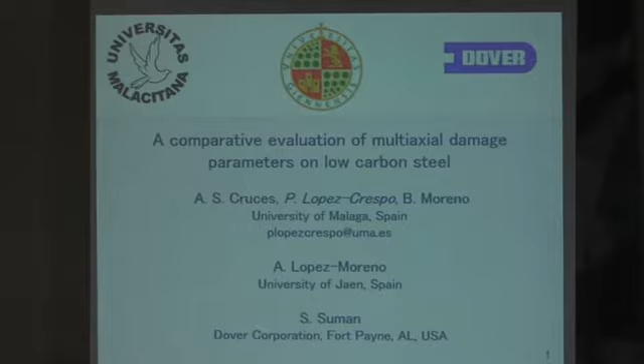In the title it actually said multiaxial damage parameters, but I'm actually going to speak about really just one damage parameter and some damage parameters overall. First, I would like to thank my colleagues from the University of Malaga, the University of Jaén, and from Dover Corporation for their help.

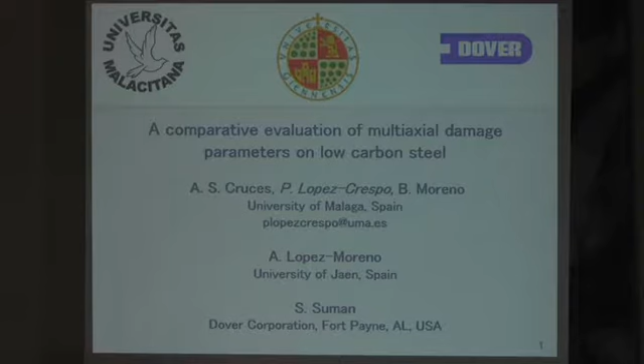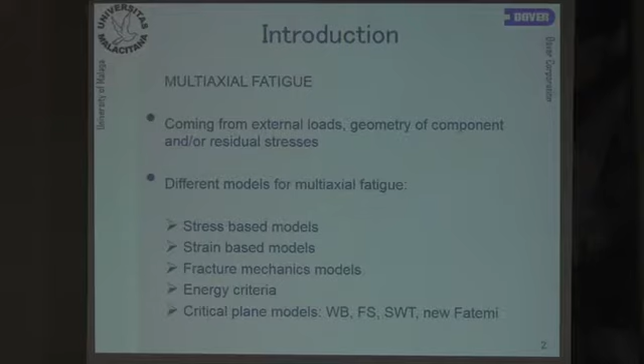Before everything, I'd like to say that I'm kind of new in this business of multi-axial fatigue. When we started, maybe 3 or 4 years ago, working on multi-axial fatigue, we looked at the literature and saw there were quite a few models like stress and strain-based models, fracture mechanics, energy criteria, and also critical plane approaches. We thought the critical plane models were quite interesting because, in principle, they give information not only about the fatigue life but also the dominant crack plane. Since we were involved a couple of times in the crack path conference, we thought maybe this is interesting, because if we already have the initial crack orientation, we've got kind of half of the problem sorted out.

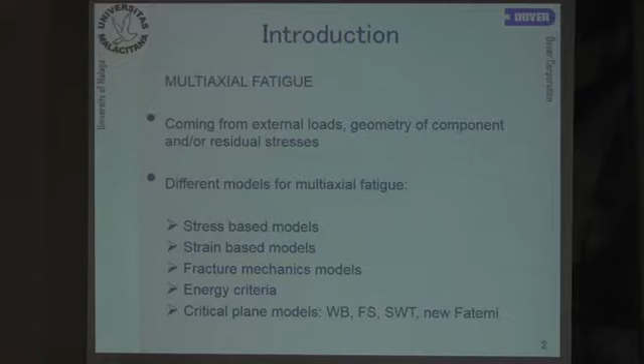That's why we decided to do the first preliminary analysis with the multi-axial critical plane models. We thought of using some of the most cited ones: Wang-Brown, Fatemi-Socie, and Smith-Watson-Topper. Last year we went to the multi-axial conference in Seville, and Fatemi proposed a variation of his model from 1988 with Socie, saying it was much better and would improve the fatigue life prediction. So we thought, since we're trying different models, why not try it too? We gave it a try with this new Fatemi model.

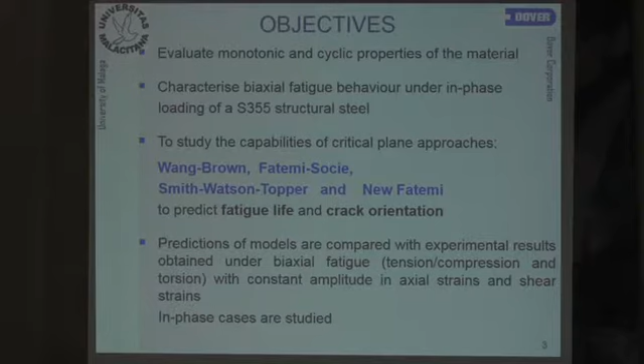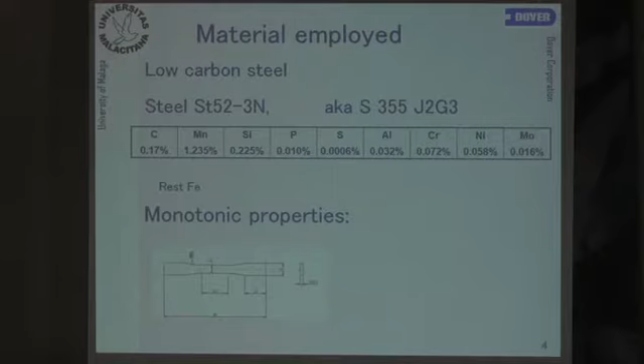For predicting the fatigue life and the crack orientation, we thought we could just apply the models directly, but of course we needed to do more. We had a structural steel and had to do a whole characterization, both monotonic and cyclic. That was the first thing we needed to do. We took a structural steel, S355, low carbon steel, and did some monotonic tests for finding tensile and compression properties.

We also had to get involved with the biaxial machine. We weren't really looking forward to it, but in the end we had to. We had to use the biaxial extensometer, which is quite tricky because of this pin which holds the sample - it doesn't really grip very tightly. So you need to be really careful when you mount the extensometer, and on top of that, if the machine moves a bit more than normal, the whole experiment is ruined because it's strain control. That was one of the difficulties we found in the experiment.

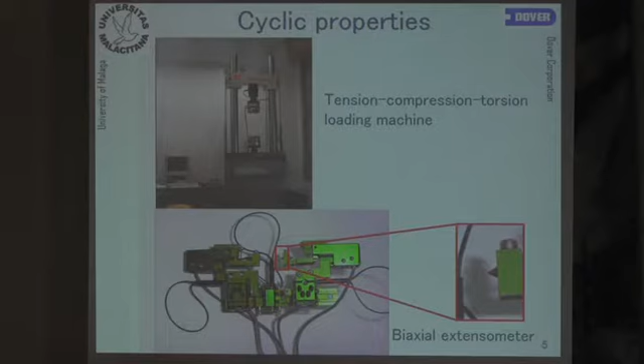Let me give you a tip: a small piece of sandpaper bonded on the specimen is going to solve the problem. Just bond a small piece of sandpaper right where the pin goes, over the sandpaper, and it solves the problem. So hopefully next time we can go from 4 Hertz to maybe 10 Hertz. Don't be too optimistic.

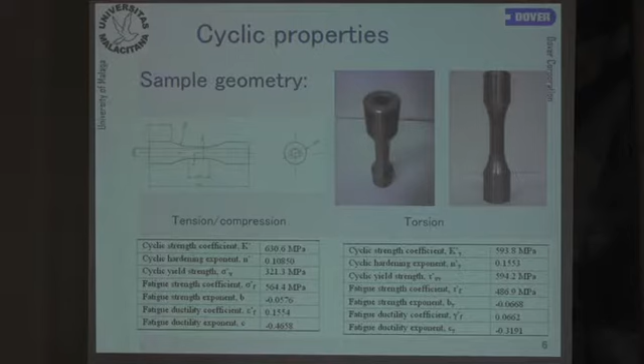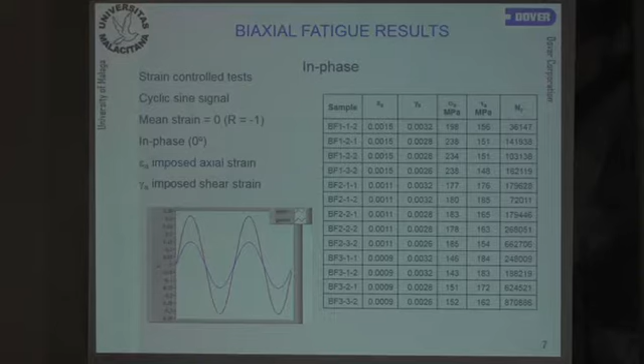Anyway, we managed to measure the cyclic properties, both in tension, compression, and torsion, and then we did a few in-phase and out-of-phase tests with zero mean strain and with imposed axial and shear strain. We did 13 in-phase tests and 11 out-of-phase tests. In this talk I will only speak about the results of the in-phase tests, because it's just easier.

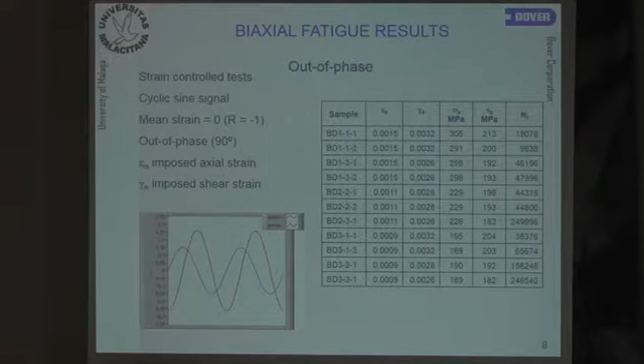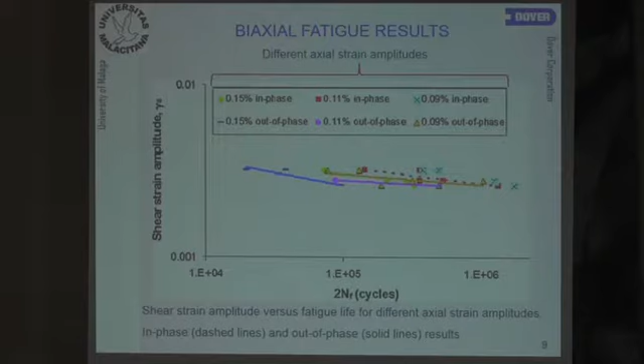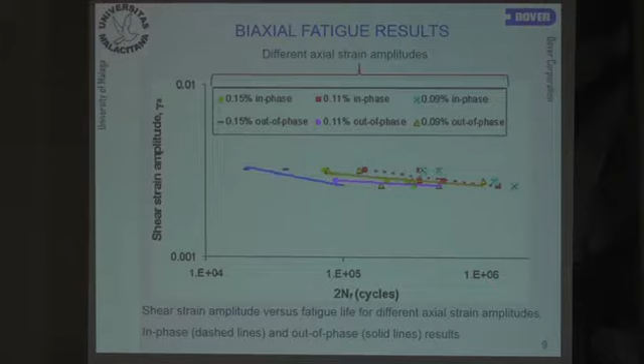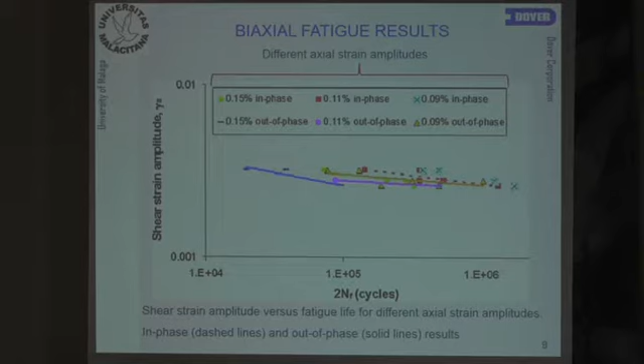So we can see here the results of all the tests. This figure was useful for us to see that we weren't doing everything very wrong, because we can see that comparing in-phase and out-of-phase, the out-of-phase experiments had a lower fatigue life. That made sense and agreed with the literature, so we figured we were doing things more or less all right.

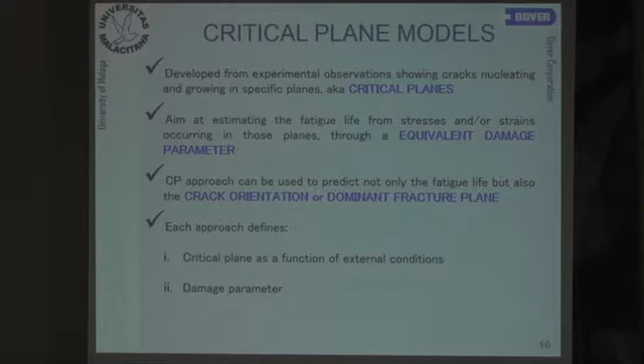So we started using the critical plane models, and we found that they give a prediction not only of the fatigue life but also the crack orientation, which was interesting. We started with, for example, the Wang-Brown model, which is based on the assumption that the cyclic shear strain causes crack nucleation, and then the cyclic normal strain contributes to crack growth.

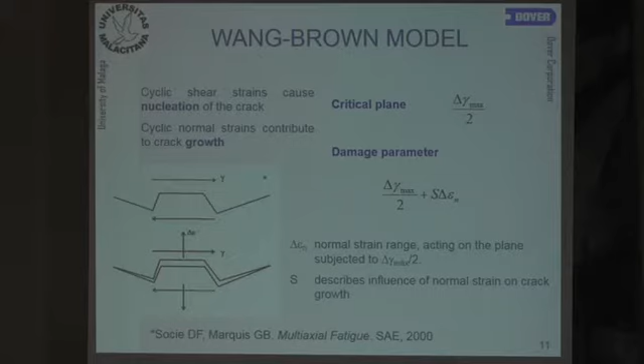So which is the real critical plane? Originally it was defined as the one with maximum shear strain, but I guess the second definition, the one with maximum damage parameter, is better. We actually tried both, but it was a question I wanted to ask around, because I keep seeing papers, even recent ones, where they assume the critical plane is the first definition, while other regularly published papers use the plane with the maximum value of damage parameter as the critical plane.

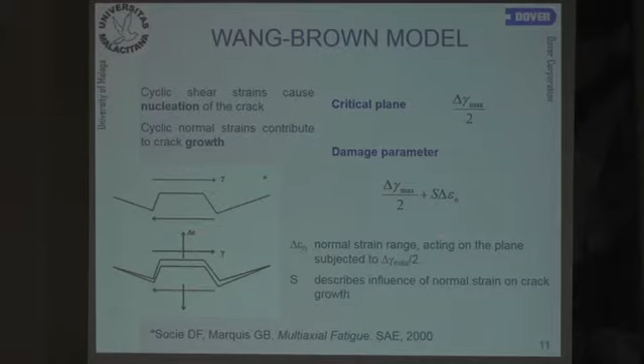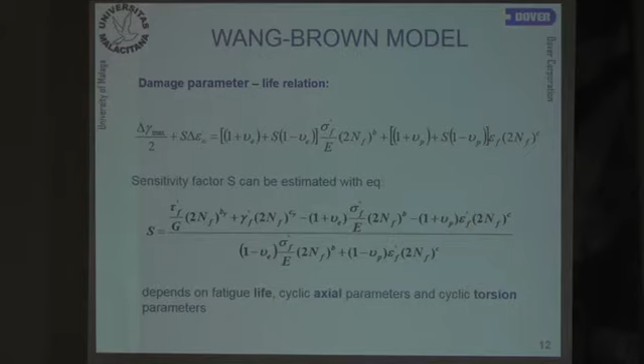Wang-Brown also gives a relation between the damage parameter and the life. We also looked at the Fatemi-Socie model.

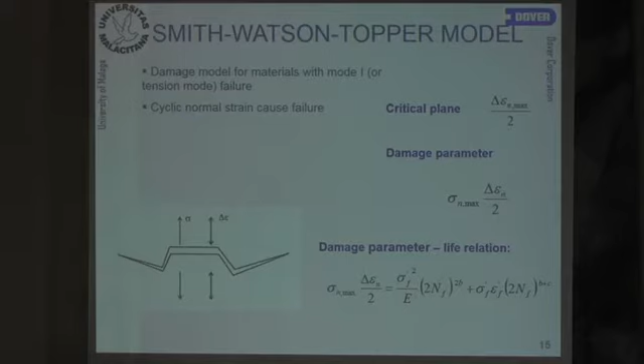We also use the Smith-Watson-Topper model, used for materials with mode 1 or tensile failure mode. It assumes that it's a cyclic normal strain that causes the failure. In this case, the critical plane and the damage parameter are coincident. Again, we have a relation between both.

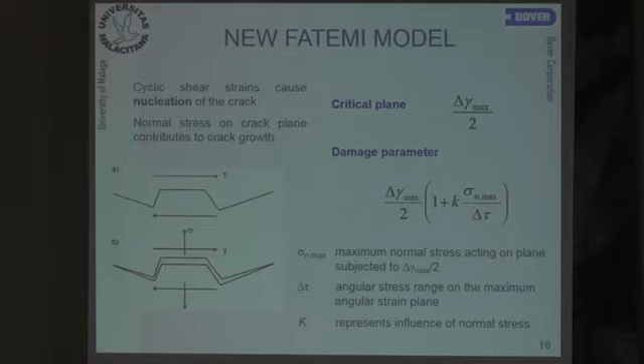And finally, the new Fatemi-Socie model is similar to the other model. It assumes the nucleation of the crack is caused by cyclic shear strain, and the normal stress on the crack plane is the one that also contributes to the crack growth. But instead of using the yield stress to make this term dimensionless, it uses the angular stress range on the maximum angular shear strain plane. So that's the small difference.

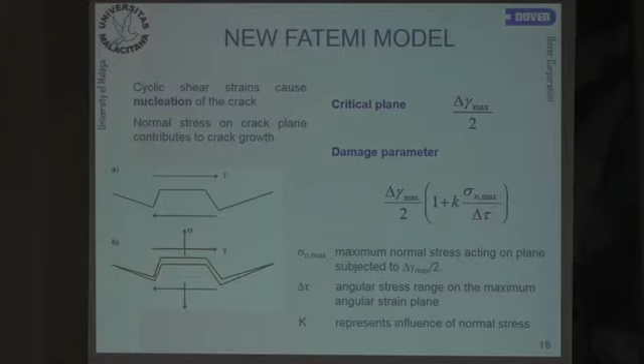Last year he said at the conference that he would get much better results, so we just wanted to try it.

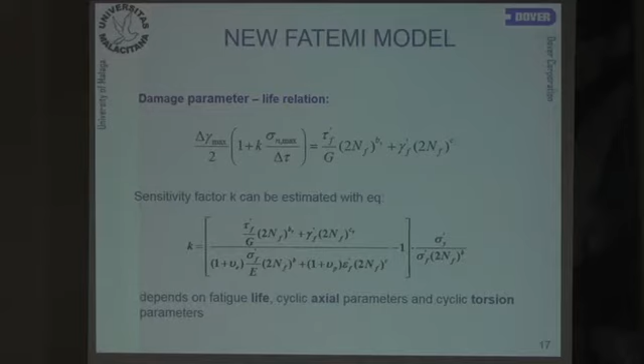It also uses sensitivity factors that depend on the fatigue life and the cyclic axial parameters, and torsion parameters. Last year he said it depends on the material, and in our case it was 1.1, the value of this scale.

So we had to do an evaluation of all the planes. For the proportional loading, it was a bit more clear to us, because the maximum value through the cycle was easier to identify. For the non-proportional loading, it was a bit more difficult. We had to evaluate all the points.

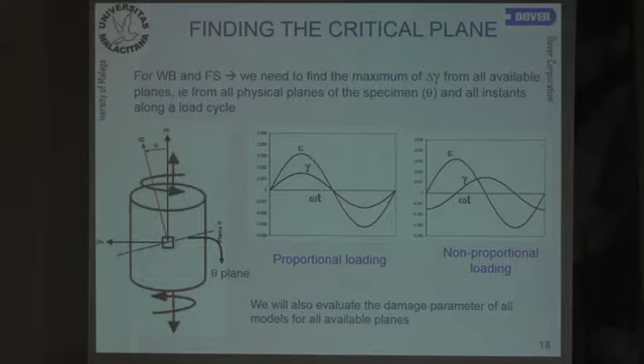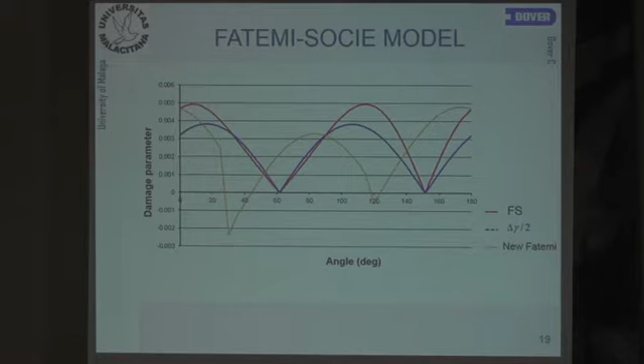And then we plotted the evolution of the damage parameter and the shear strain amplitude. We saw that, as I was saying before, the critical plane, both according to Fatemi-Socie and Wang-Brown, would be those with the maximum value of the shear strain amplitude.

But then the maximum value of the damage parameter, for example in the case of Fatemi-Socie, is not exactly at this value, here around 105 or so, but at a slightly bigger value, and then this other point, the maximum value of the damage parameter, is shifted as well.

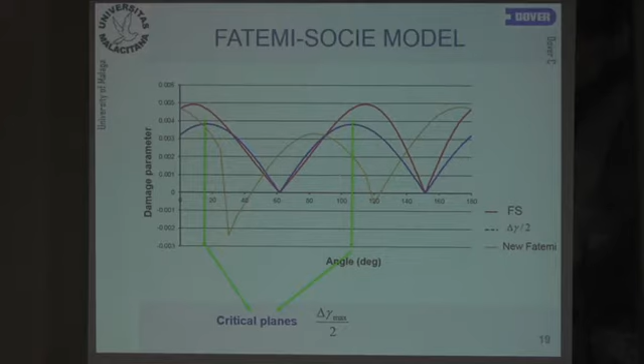So the other thing is that from a mathematical point of view, the maximum range actually happens at one single point, but from a material science point of view, where we have microstructural features, like any type of defects or microstructural barriers, it doesn't make sense to use just one single point with the maximum value of strain.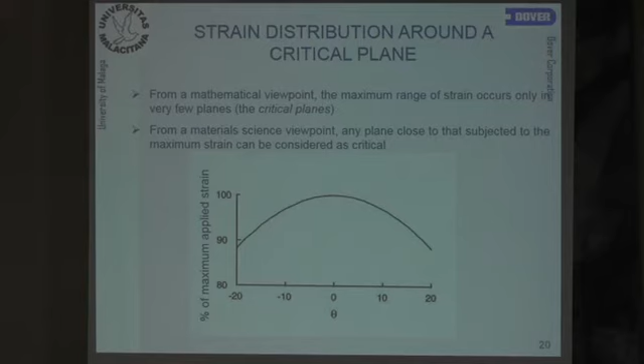So what people normally do is, instead of considering just one single plane, use a range of planes. Provided we go between plus minus 20 degrees, we would have a strain value of 90% of the maximum, which makes sense.

So we looked at the different plane orientations, and we observed that if we look at the first critical plane predicted by Fatemi-Socie, one of the planes with the maximum shear strain amplitude, only two of them agree using this 90% of the maximum value criterion.

If we use the second critical plane angle, 6 planes agree out of the 13 specimens that we tested. Then we looked at the maximum value of the damage parameter: for Wang-Brown, none of them agree; for Fatemi-Socie, 5 planes agree; and for Smith-Watson-Topper, none of them really agree.

So nevertheless, we found that the agreement between the plane orientation and the one predicted by the model was not very good. But we still used the model for looking at the fatigue life.

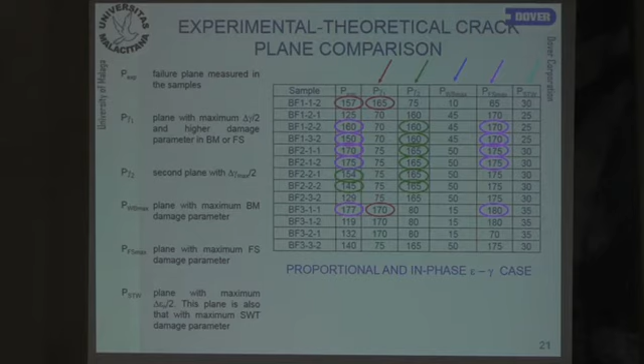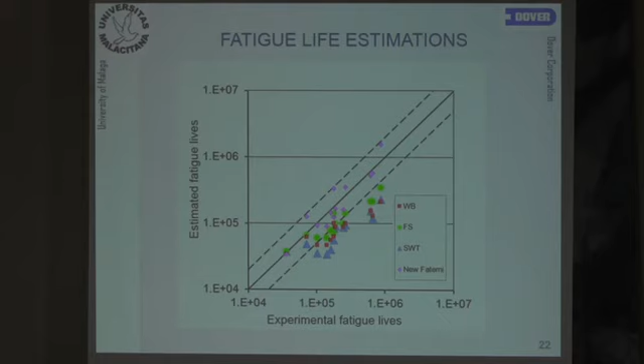And then, as I said, Wang-Brown and Smith-Watson-Topper were all conservative, but slightly worse than the Fatemi-Socie model.

So that's it, really. To conclude: we've done a series of tests, and we produced a new database with experimental biaxial fatigue data for a widely used structural steel.

We observed that the real failure plane and the critical plane predicted by Fatemi-Socie agreed to a certain extent, Wang-Brown less so, and Smith-Watson-Topper, for this series of tests, didn't really agree.

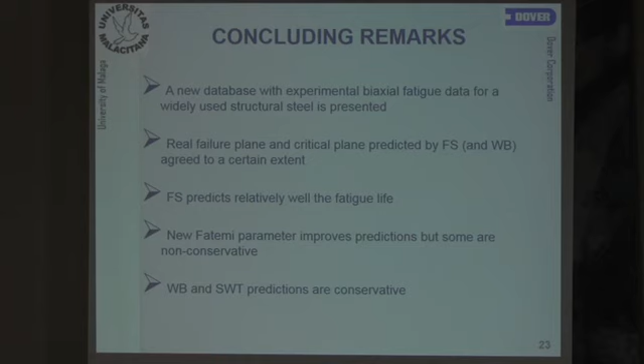The best predictions were produced by the Fatemi-Socie model, with a slight improvement obtained with the new Fatemi-Socie parameter, but some of those predictions were non-conservative.